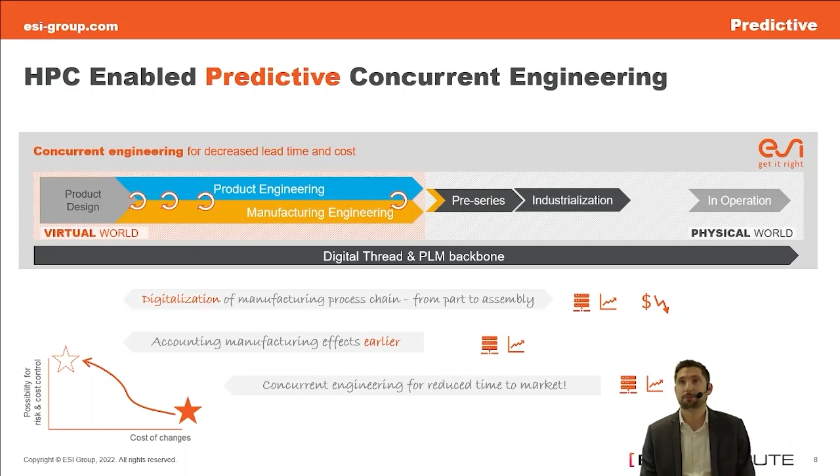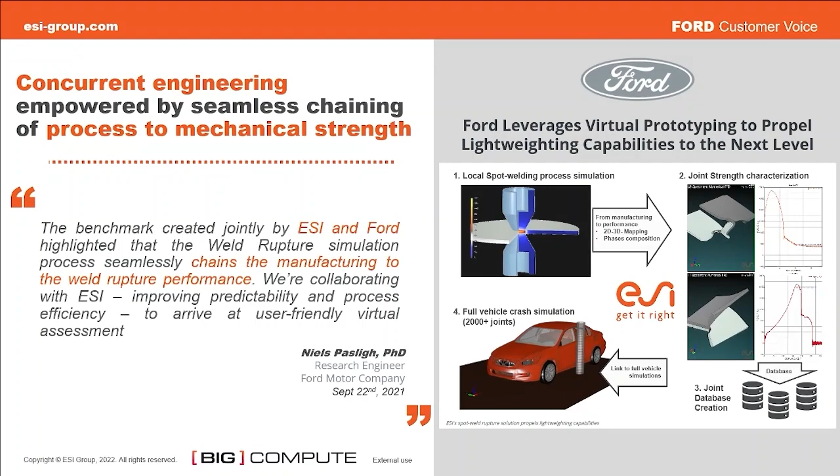As an example, I would like to give you some insights on a recent collaboration with Ford to develop a solution integrating customer workflow from manufacturing to performance engineering. Here you see an example where a local joining process is simulated in detail, transferred to joint strength characterization, in order to enable the creation of a database to be used in full vehicle crash simulation to predict accurately joint behavior during a crash. Using this tool in the engineering phase is key, as it enables us to anticipate rupture connection during severe loading of a vehicle, and thus avoid redesign in case of late issue discovery.

Here you see another example, and you see how Renault is a customer using our solutions to validate and certify its full car product performance. Thanks to concurrent engineering, it enabled them to achieve the Euro NCAP 5 stars without any additional prototype.

Our customers are continuously working with us for predictiveness and continuous reliability. In the past 10 years, a full digital vehicle model has increased in complexity by 4. Now it's over 10 million elements, including detailed airbags and failure models, and yet the simulation time has reduced by half. Today it's around 6 hours on hundreds of cores. And even as we improve the performance of our solution, the increasing complexity and configurations to be tested, like loads, body, and powertrain variants, are increasing the demand for computation power and cloud solutions.

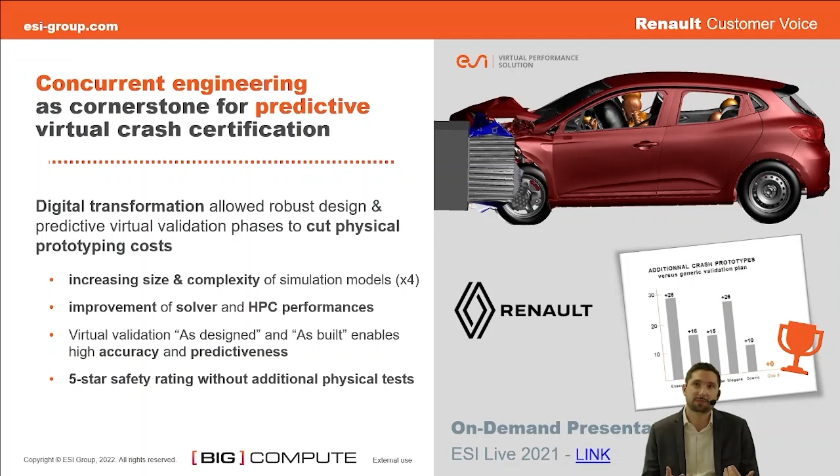In a very challenging environment, with an accelerated industry transformation towards aggressive sustainability goals, increasing competition, and new emerging technologies, predictive virtual testing with trial and error design-simulation loops is very important, however no longer sufficient. Decision makers need to be more agile and able to efficiently make the best decisions, get it right, at the right time during each phase of the development process and even beyond. This is where the aspect of enriching simulation with AI and data comes into play.

Virtual testing and simulation is typically a complex and time-consuming activity. Therefore, simulation capacity is today typically only accessible to a limited set of expert users that in turn support individual business processes and departments. This approach limits the number of virtual testing and tryout iterations that can be performed during the development process, which can in turn lead to important issues not being discovered until late in the development process, triggering costly changes, or in the worst case, missed completely, leading to failure or even safety issues in the operation of the vehicle. So today, this is no longer a sufficient approach.

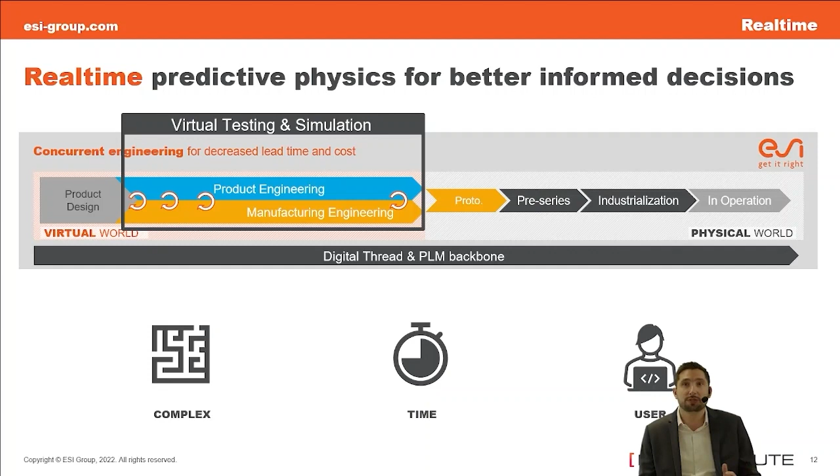We are thus focusing our efforts on providing solutions that can be applied to a broader range of stakeholders, to guide informed decisions throughout the development process. This includes solutions for efficient design space exploration in the early product design phases, as well as solutions for robustness analysis and virtual process and tooling tryout in manufacturing engineering.

By combining predictive physics with ESI's unique model order reduction technology, even non-expert users can in real time explore and optimize the product or production outcomes, by adjusting selected design or process parameters, democratizing the use of predictive physics with new groups of stakeholders in the development process.

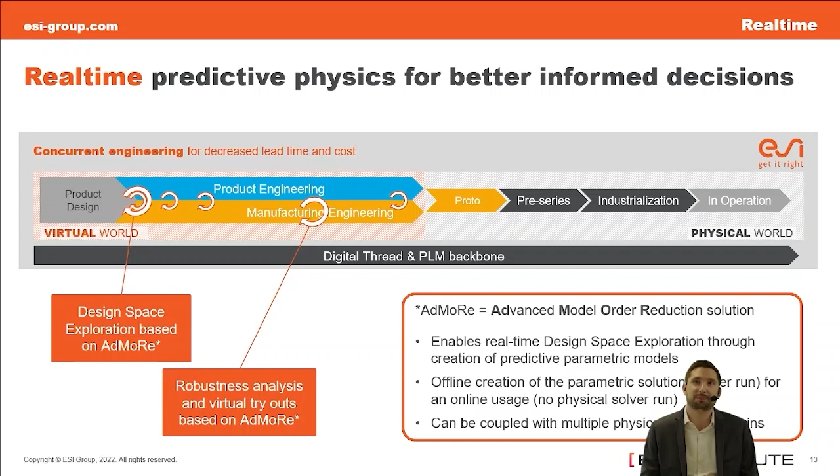ESI provides a unique advanced model order reduction solution. We call it ADMORE, that can be coupled with multiple physics solvers. ADMORE supports the definition and design of experiments to efficiently study the real-time model response when adjusting a defined parameter set. Combined with a user-friendly interface, ADMORE allows for the democratization of powerful simulation capabilities with new groups of users.

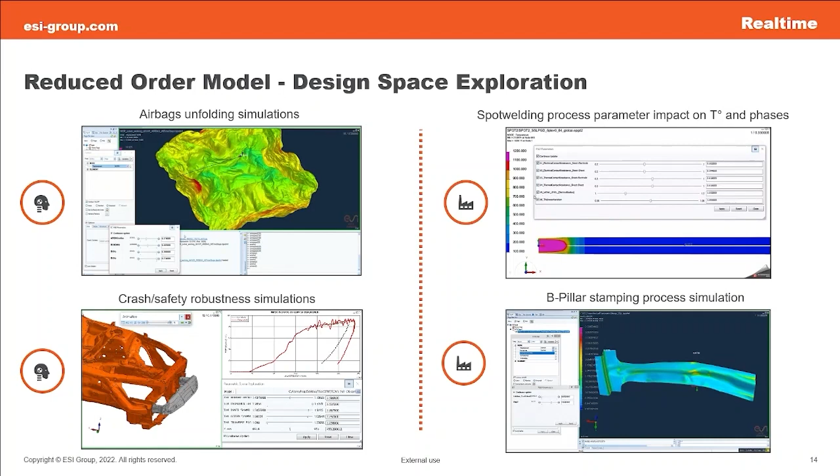In these examples, you can see ADMORE applied to a variety of use cases like airbag unfolding simulation, crash and safety robustness simulations, spot welding process parameters and the impact on temperature or metallurgy, or even parameter sensitivity for stamping simulations.

Moving later in the life cycle of the product to the physical world, we can combine predictive physics and model order reduction with real-life operational data and machine learning to create a hybrid twin that will enable further informed real-time diagnosis and prognosis to assess the current status and predict the future behavior and aging of a product or a production asset.

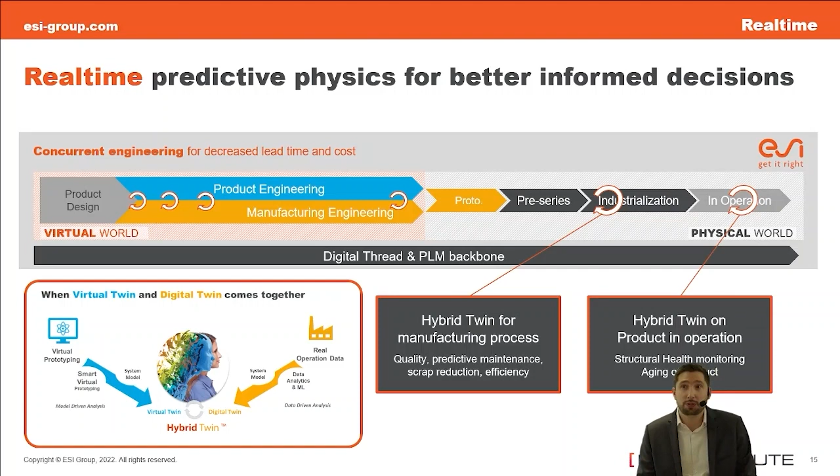Typical application for a hybrid twin includes the manufacturing phase of the product on the manufacturing line itself, to optimize quality and production rates while minimizing scrap and energy consumption, or later during product operation, structural health monitoring to optimize lifetime performance and minimize downtime of this same asset.

So we have already covered the dimension of predictiveness and real time to support making the right decision at the right time. Let's now look at the third key component, focused on immersive experience.

We know most decisions are not done by individuals, rather through a collaboration of stakeholders applying their individual perspectives to arrive at a good solution. Also, some aspects of the product or process design need to be experienced firsthand from a human-centric perspective in order to truly understand whether the targeted design will work in real life.

So how do we achieve these goals, considering the reduction of physical prototype, cost, time, and travel? With the ESI IC.IDO solution, you can enable cross-functional teams to collaborate in a virtual world, where you can bring your product to life and realistically experience how to build or maintain it, without physically constructing any prototype.

You can interactively perform realistic tryouts, validation, and commissioning of your assembly line or maintenance processes, while securing safe and efficient processes for your workforce, effectively enabling your own industrial metaverse for collaboration within the extended enterprise.

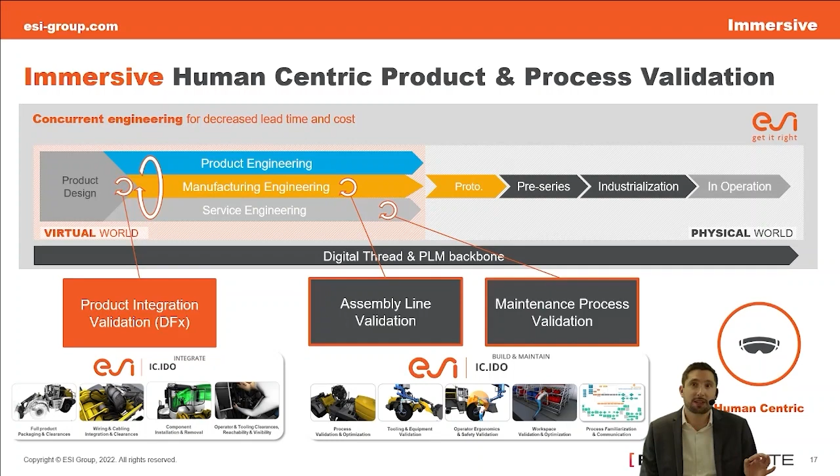So how does the ESI IC.IDO VR solution relate to the topic of supercomputing and cloud? The answer lies in our application of the latest NVIDIA CloudXR technology. CloudXR allows you to efficiently enable distributed collaborative virtual workspaces with high levels of flexibility and mobility.

By enabling the streaming of high-quality experiences to wireless VR devices within your local environment, these workspaces can then in turn be connected to other sites, enabling distributed collaborative virtual workspace across the extended enterprise.

And with the rise of new high bandwidth mobile and wireless network technologies such as 5G, the flexibility and mobility of this collaborative workspace will be even further expanded, and it will also allow for fully cloud-hosted environments.

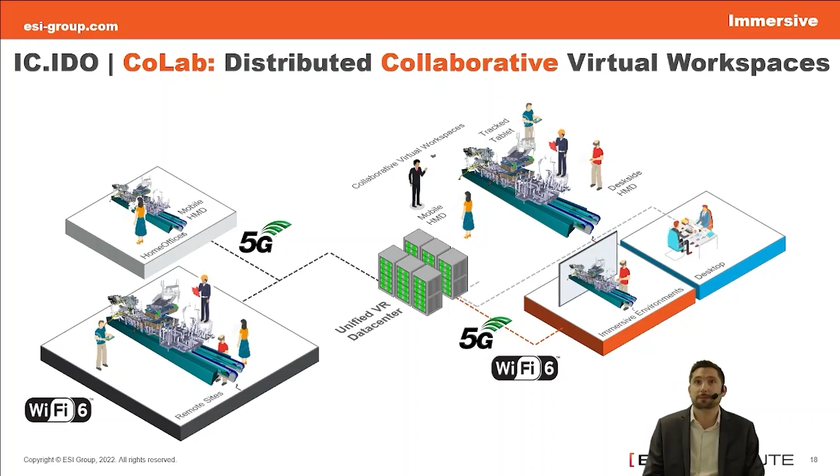So what you can see on this slide is the new IC.IDO CoLab solution releasing in the next months, as powered by NVIDIA CloudXR. The solution was first introduced together with Volvo Group at the NVIDIA GTC event earlier this year.

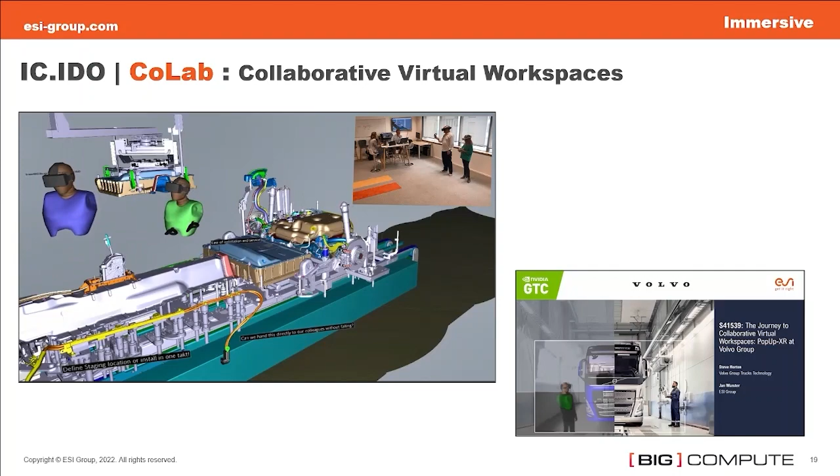To conclude, at ESI we are convinced that digital transformation is going beyond virtual testing, and that offering predictive, real-time, and immersive software solutions for the industry is key to support making the right, collaborative, and human-centric decisions at the right time. We have a very exciting journey ahead of us, and we are very much looking forward to continuing working with our customers and partners like Rescale.

We are sure that Cloud HPC solutions will play a key role in supporting the digital transformation toward a safer, cleaner, and more productive industry. Thank you very much.